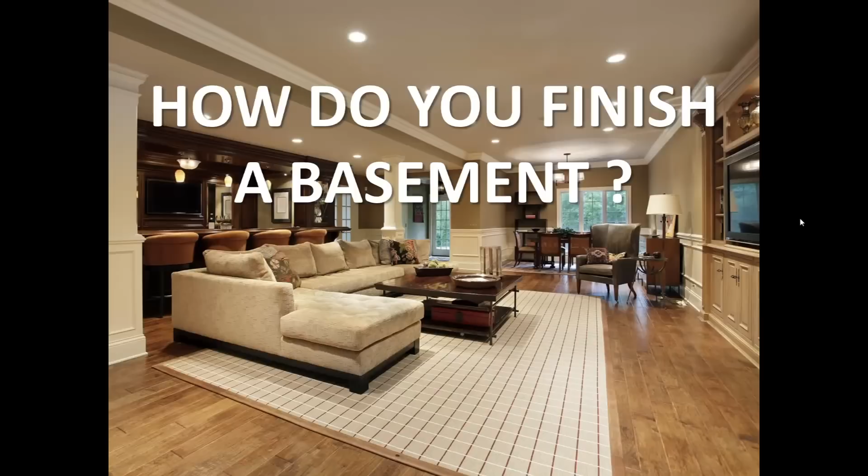Finishing a basement is a big project, but it's not a hard project.

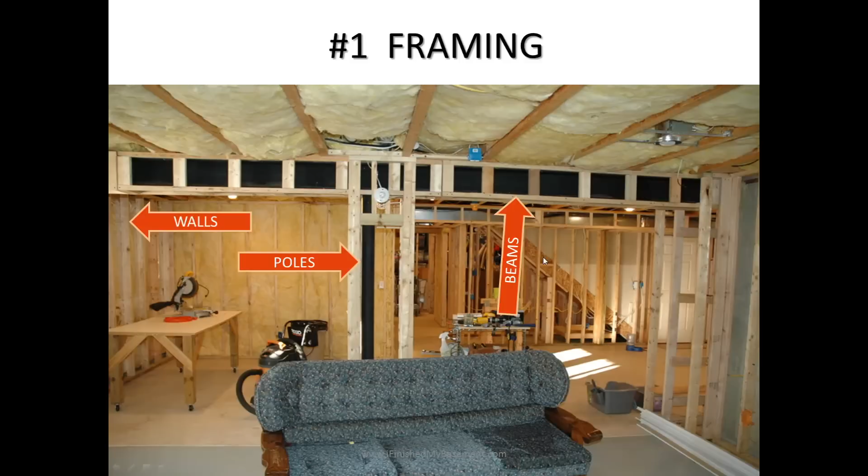All right, phase number 1, framing. This is the part with the wood, 2x4s to be exact. You frame your walls, your windows, your beams, your poles, your art niches, your built-in bookcases, and a bunch of other stuff. This is the bones of your basement, and it's the first thing that you have to do.

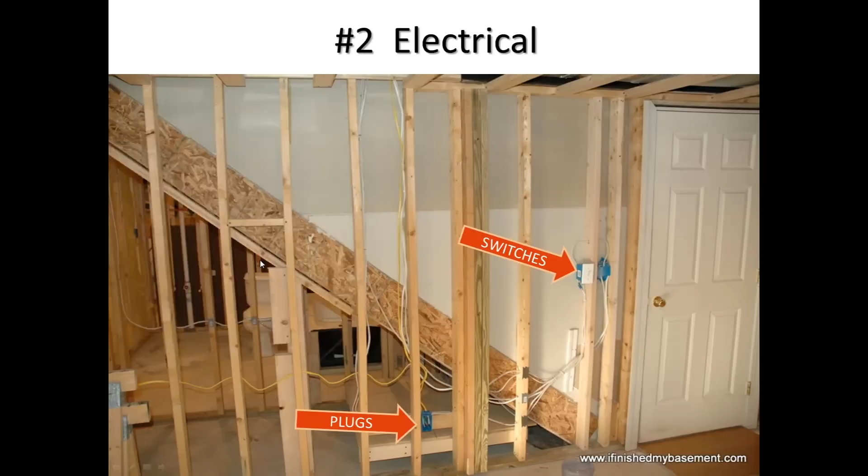Number 2, electrical. This is the part with the wires. You wire your lights, your plugs, your ceiling fans, and any of those fancy workout machines that you bought off of Craigslist. I know you did it because I did it too. There's one sitting down in my basement right now, and I've never ever used it.

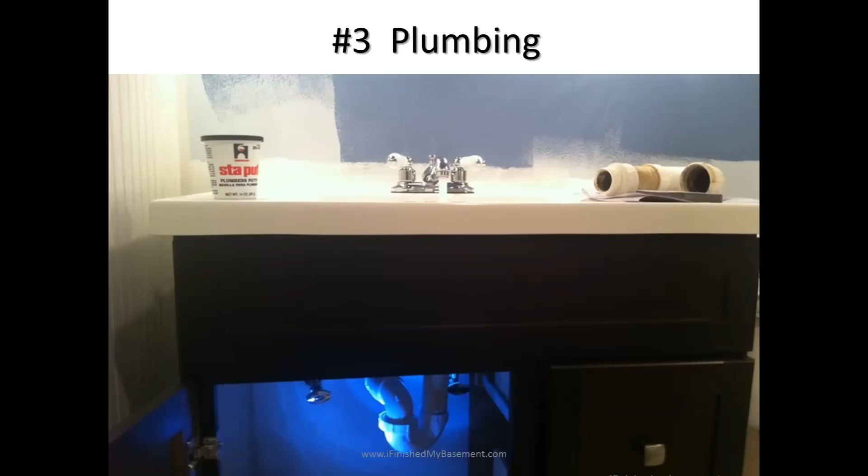All right, number 3, plumbing. This is the part with the pipes. If you want a bathroom in your basement or a sink to wash your dog, you're going to have to install some pipes to make sure that everything that's clear and clean gets where it's supposed to go, and everything that's bad and brown goes where it's supposed to go.

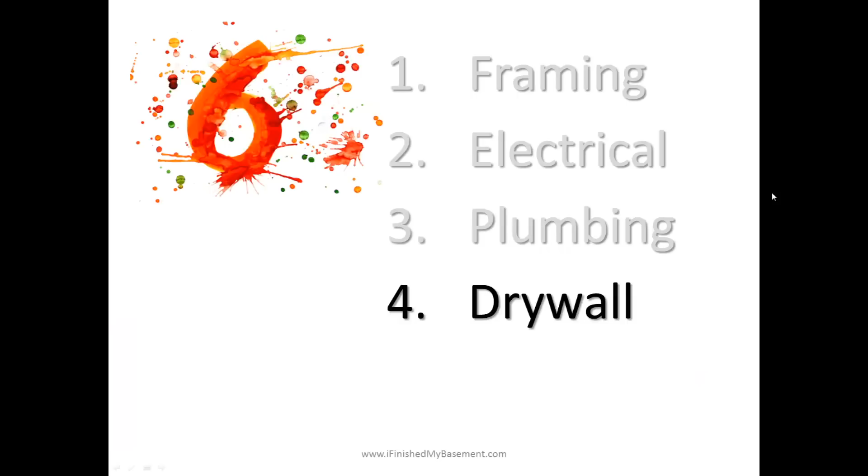Number 4 is drywall, and you guessed it, this is the part with the drywall. All of your awesome work is going to get covered up, but it also means that everything in your basement starts to look like a real room. There's going to be dust everywhere, and your wife is probably going to yell at you, but it's going to be worth it. It's going to look great.

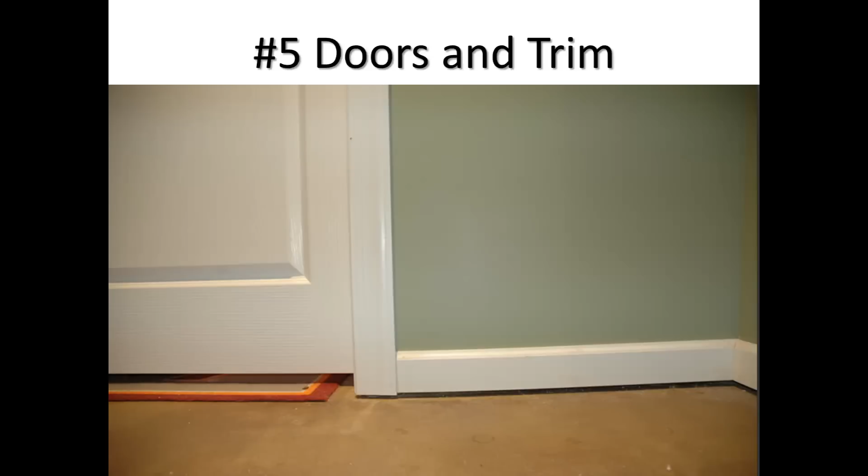All right, number 5 is doors and trim. Now we're getting somewhere. Putting your doors on means that you actually have a room.

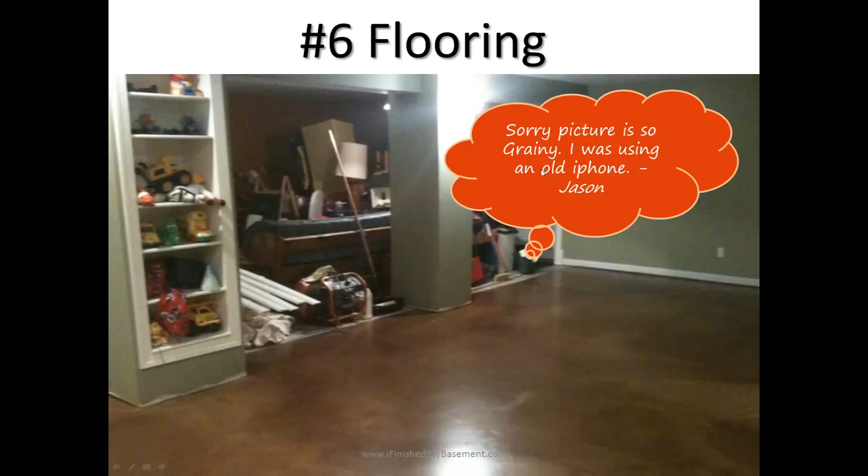Number 6, flooring. You got carpet, you got tile, there's stained concrete, you can put down laminate, there's vinyl, there's cork. There's about a zillion different flooring options you can go with, except for real, honest hardwood. You do not want to put that in your basement.

So those are the top 6, the major ones. There's a bunch of little guys in between there, but those are the biggies. Before you can start any of those, though, you've got to do the 4 setup phases. Let me cover those real quick.

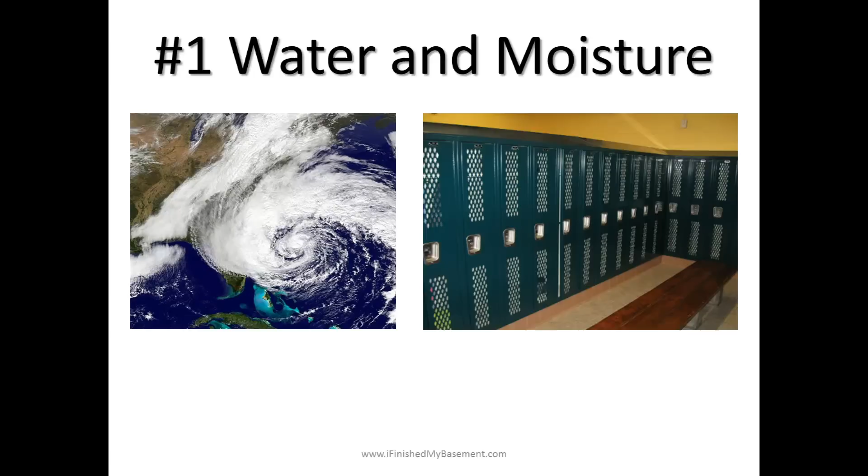Number 1, water and moisture. You don't want to do all the work in your basement just to watch it flood next time Johnny Big Storm rolls into town. And you also don't want it to smell like your high school locker room. Don't worry, there's a lot of things you can do to fix water problems in your basement. And in 99% of the cases, it's not going to cost you a bajillion dollars. You can get a dry, good-smelling basement.

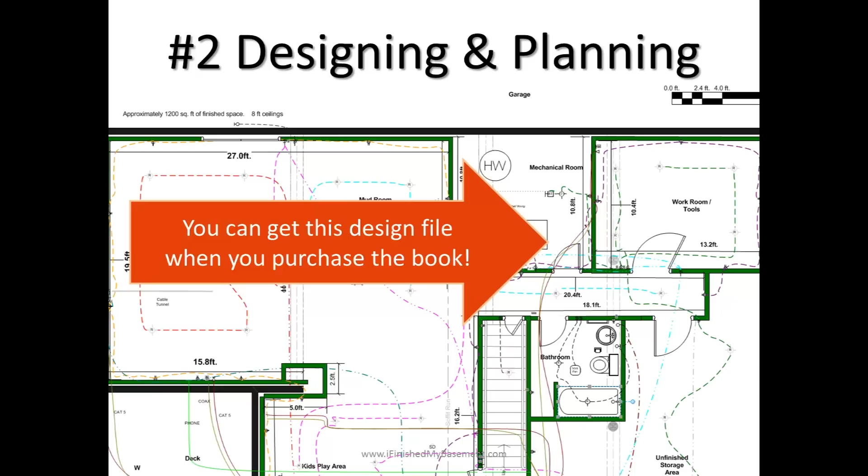Trust me. All right, setup phase number 2, designing and planning. You need a basement design, and you need a work plan. These are the fun phases. This is the dreaming part. This is the sky's the limit part. This is Oprah giving out gifts to the audience part.

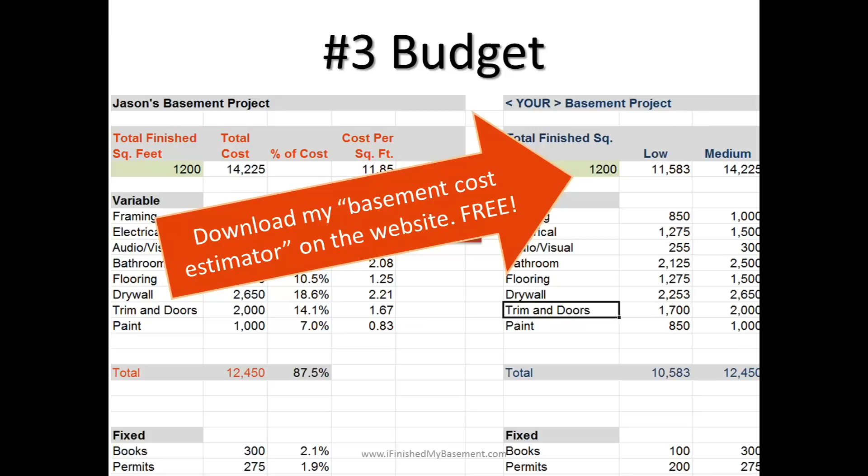Section 3, budgets. Now, unless you're crazy rich, you need a budget. You can't just throw money out the window and start spending. This is the boring part. It's not very much fun unless you're like me, who's a great big nerd and just really love tracking stuff and writing it all down in a spreadsheet.

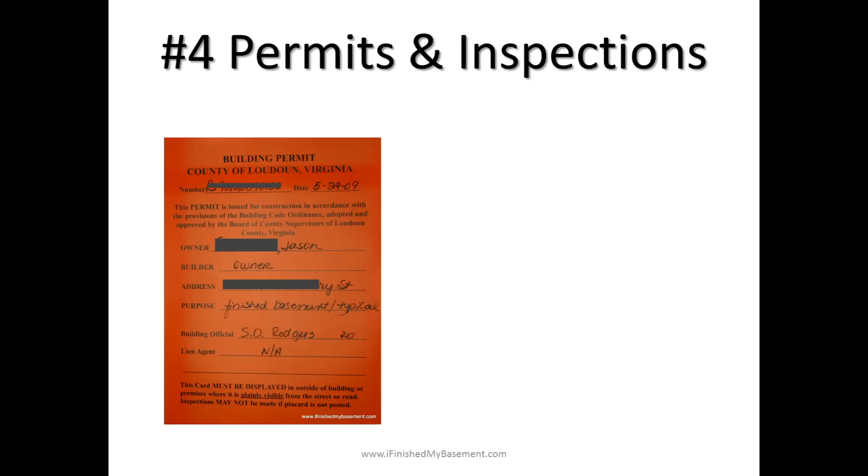Part 4 of the setup phases, permits and inspections. Oh, you weren't going to skip this part, were you? Of course you weren't. You got to get permits, and you need to get your inspections. It's not as bad as it sounds. Look, this is a huge investment. You're putting thousands of dollars down. You don't want to just walk in there and throw it up and not tell a soul. Somebody who's a professional needs to come and check it out.

All right, so those are the 4 setup phases. We've covered the 6 major phases. Now it's time for the most important thing. This is the first thing you should do. This is the thing that you should do this weekend. Screw that. How about today?

The most important thing you can do is to start. You should start now. Start this weekend. Start with a couple of test projects. Build a small workbench. Build one test wall. You don't need a bunch of fancy tools. You don't need a permit. You don't need a plan. You don't need a design or a budget or any of those things to frame out a small wall or to build a workbench or a storage shelf.

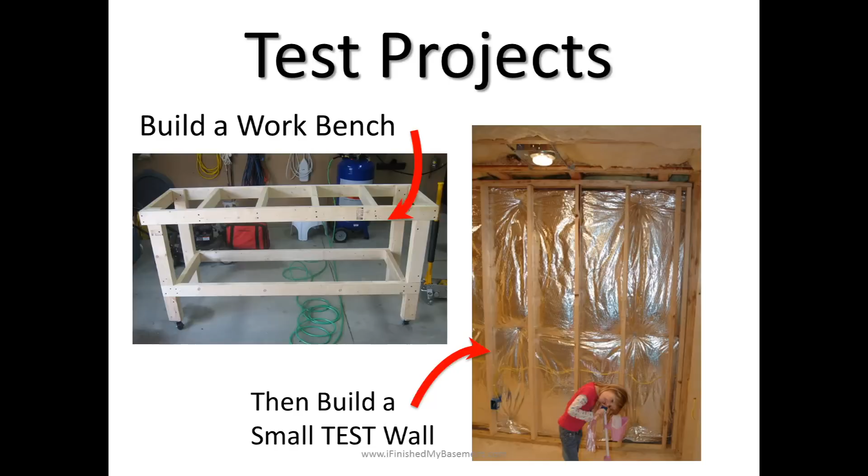Start today. Build up your confidence. Get used to your tools. Prove to yourself that you can do it. I promise you, you build that small wall and workbench and you're going to be ready to tackle the rest. Then you can go into the major stages.